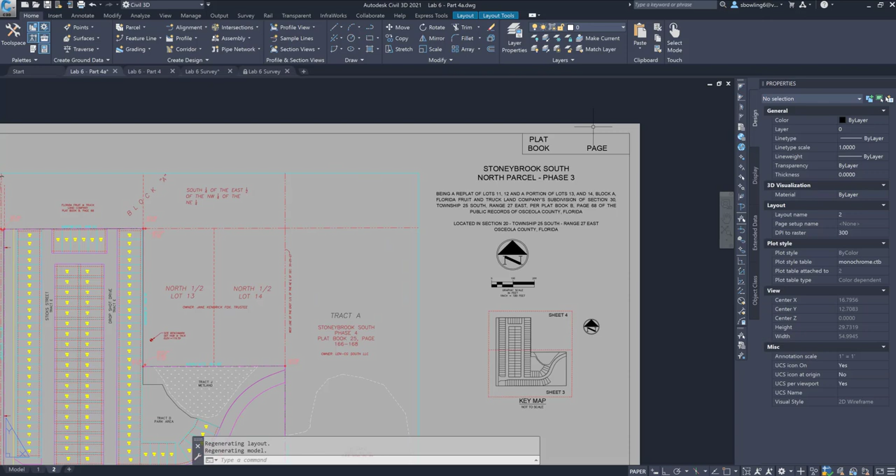All right, so I've added a little bit to the Plat. Like I said, I'm not going to show you everything. It's going to be your job to do the basic text. I'm just going to show you the information. So I went ahead and created the title, the Plat book and page number block over here. This is 5 inches this direction and 2 inches off of here.

I also copied the text here. Note the style that I used. I just found a nice style in the drawing that I already had. Just to let you know, the style is called scale bar. I'm not sure why, but I liked that style, so I went ahead and used it.

Okay, so I took the header, which shows up on all of the plats, each sheet, so you can see the Stoneybrook South, North Parcel Phase 3. It shows up on every single one of your sheets. So also what shows up on every single one of your sheets is your key map and your scale. Okay, so the scale is 50 scale when we go to sheets 2 and 3. All right, so that's what we're going to do today, is start looking at sheets 2 and 3.

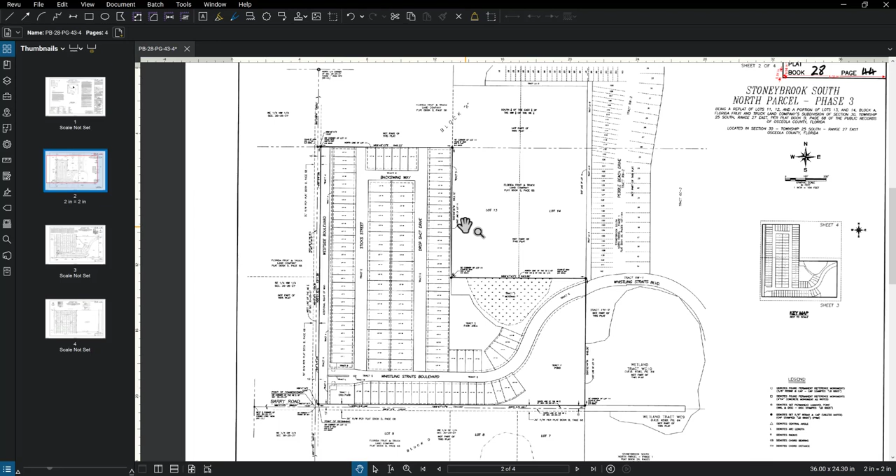I do want to show you that I started the first sheet also, but we'll talk about the notes in a later video. So go ahead and take a look at my sheet 1. What I did do is I did a screen clip and brought it in as an image. If you all don't know how to do that, how to XREF in an image, all I did is create a snippet of the Plat itself, and this is just an image.

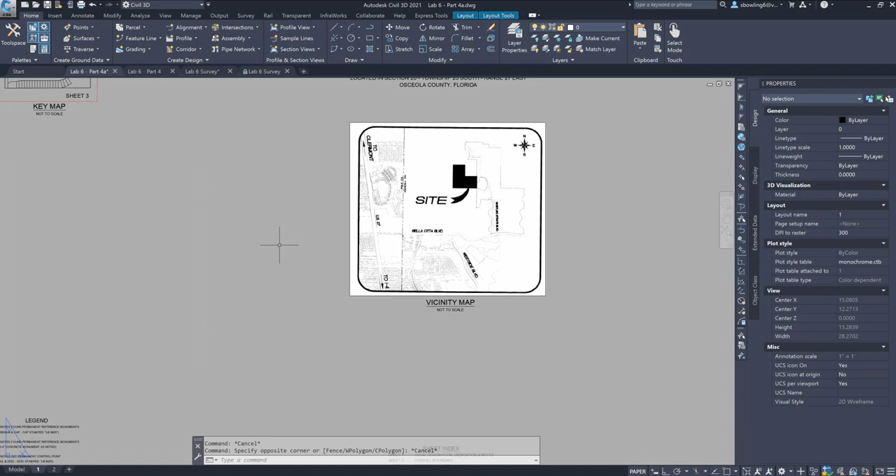If you look at the XREF, it's a raster image. So if you type in XREF, you can pull this down and you can pull in an image. All right, and that's all I did because I don't have the location map, so I didn't want to make my life any harder, so I did it simply here. Again, we'll talk about the legal description later. The legal description will go over here, and we'll talk about the dedication and notes in a later video.

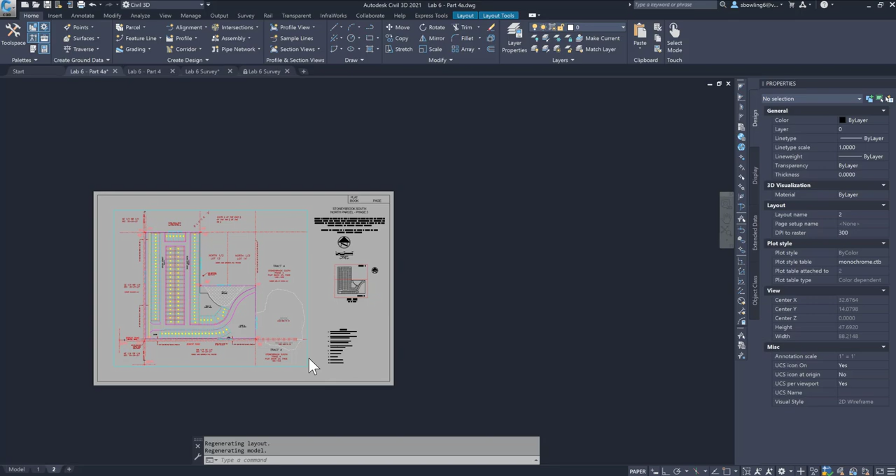Also, what I added in here, like I said, I haven't cleaned this up yet, but you all need to. Again, you all need to clean this up to make it look like the recorded plat. I did add the legend, and I started the legends on the first sheet. Now, moving on to the third sheet to get it started.

Again, I need to copy the key map, this piece of text, the Plat book. Ooh, I should have put sheet 1 of 4 on the first one and 2 of 4 on the second one, so I need to do that also. And I'll pull in the scale. All right, so let's go ahead and get started on that.

So what I'm going to do is, since I don't feel like copy and pasting, and I already know I'm going to use this information, I am going to pick sheet 2, right click, move or copy. When that pops up, you're going to create a copy and move to the end. And we're going to click on it, and we're going to right click and rename it to sheet 3. All right.

So the other thing that I'm going to do is I'm going to copy this piece of text. I always end up hitting circle, copy. I'm going to go ahead and put that. I'm going to change this height to 0.1. Actually, I'm going to go 0.15. Okay, and I am going to edit it, and this is going to be sheet 3 of 4. Not or, of 4.

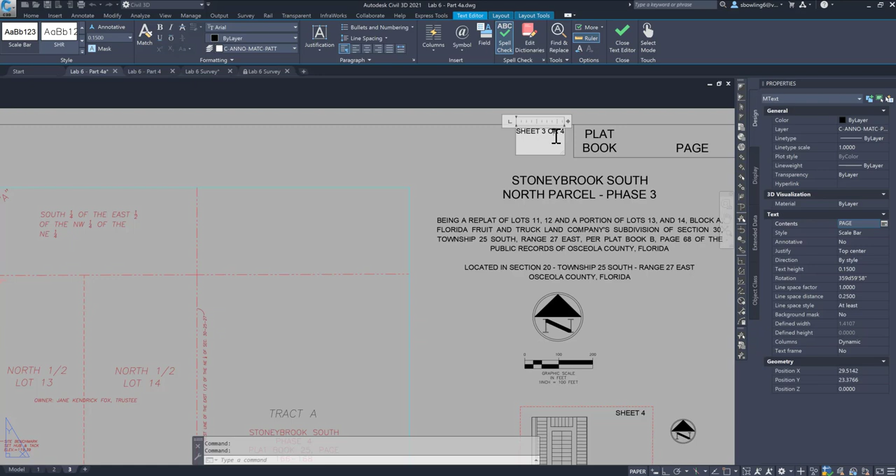All right. Now, the other thing is I'm going to click on this, my viewport, and I am going to change it to a different scale. So when I click on it, I have to unlock it and change it to a 50 scale. So 50 is not in there, so I'm going to click on custom. I'm going to add, and I'm going to say 1 equals 50. You can say 1 inch, you can do whatever you want. I'm just going to say 1 equals 50. 1 unit equals 50 units.

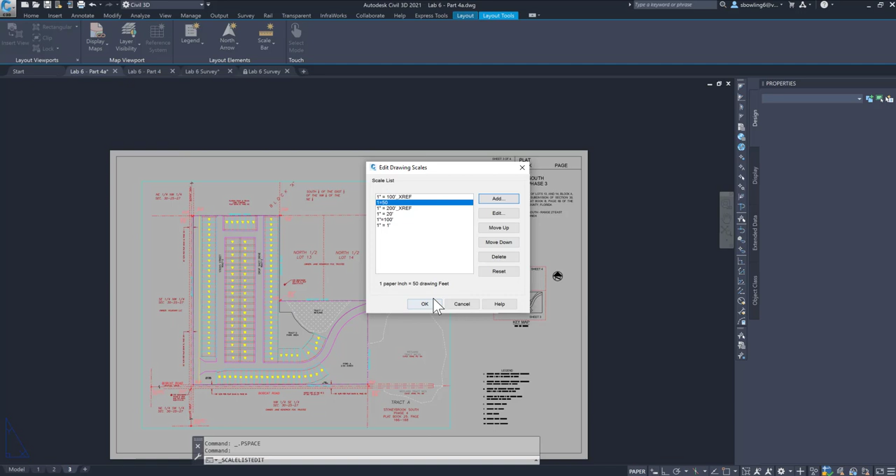All right. Okay. And I'm going to click on the viewport again, and I'm going to change it to 1 to 50. Double click inside and pan up. So I'm going to get this down to the bottom. Let me take a look at what it looked like. So I can see Berry Road all the way up to lot 12, and I can see everything over to the other side. So Berry Road, sorry, that says Bobcat.

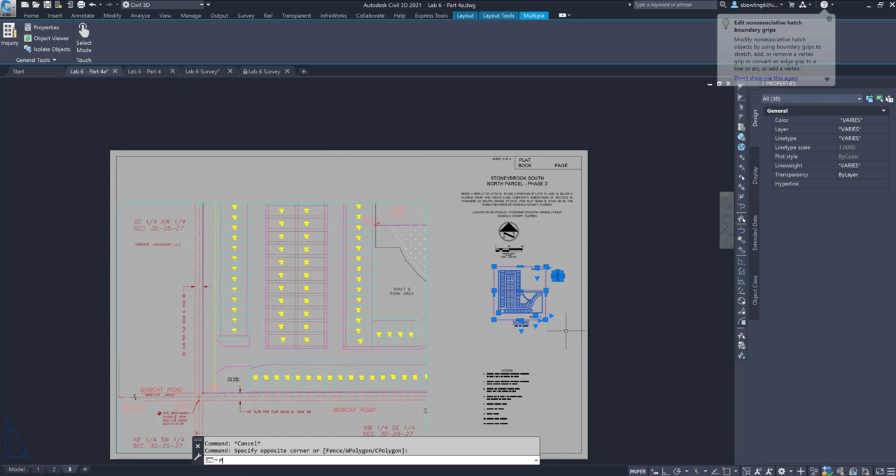So let me move this over. Let me go ahead and lock this since it's the scale that I want. So I'm going to move this over down here to this corner. And I've got to move this. I'm going to move this up here. I may end up having to scale that down. No, I shouldn't. It should be okay. And I'm going to move this up here. Now they could have left it over there.

And again, short-term memory. I can see 13, I can see 78 and 97. Now, 13, 78, 97, so I'm just going to pull this all the way over to this side. The other thing that I want you to be aware of is I need to take the word lot out there. Okay, lot should have not been in there.

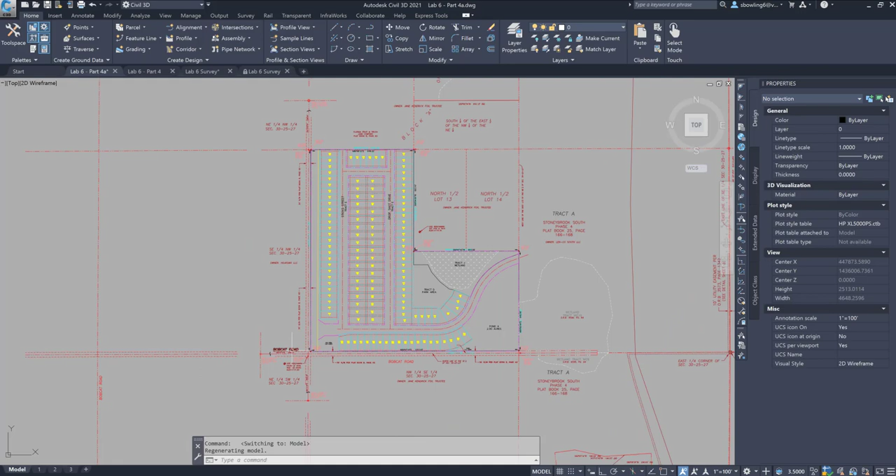So you know what you can do? I'm going to go back to the model space. Most of y'all have had to deal with Word, Microsoft Word and all that. I'm going to select similar. And I am going to type in find. When you type in find, it's like using find in any type of Word document. I want to find the word lot.

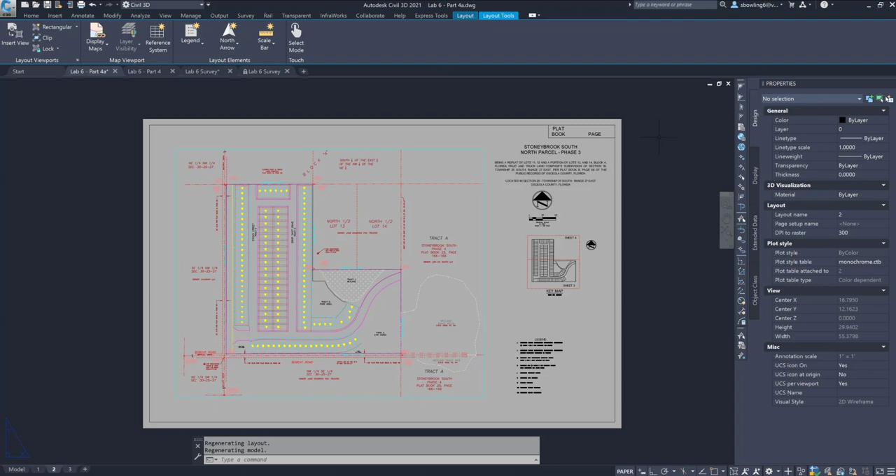Okay, so here's what you have to think of. Before I do that, I want to get rid of the word lot, but when I get rid of the word lot, it gets rid of the word lot in everything else. But because I have more words lot here, it'll be faster for me to get rid of the word lot here and then just retype it in each one of these. So that's what I'm going to do. Sometimes you have to think about the consequences. So I select them all.

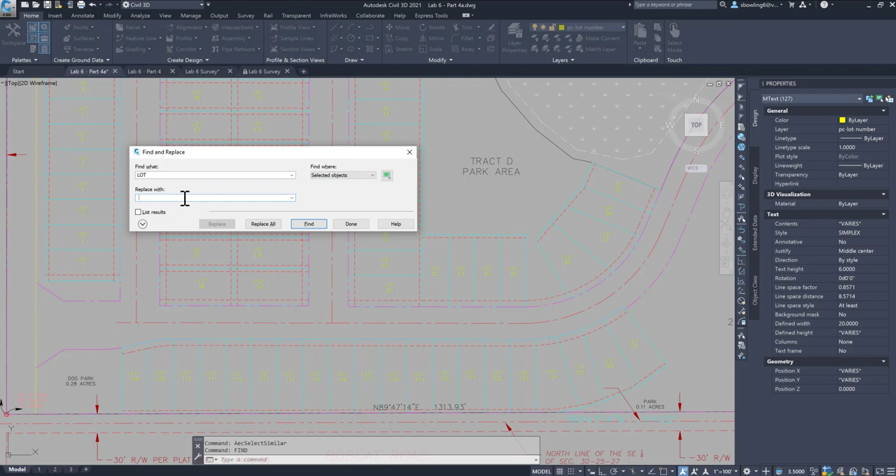I'm not sure where find is up here, but I know if I type in find, it pops up the find and replace. So I want to find the word lot and I want to replace it with nothing. I just hit the space bar once, okay? And I say replace all. And boom. Okay. And done. Now, it might be okay because I only highlighted. Yep, it worked. Because possibly I only highlighted the words in the model space. It also could be because it's not the word lots and it was just the word lot.

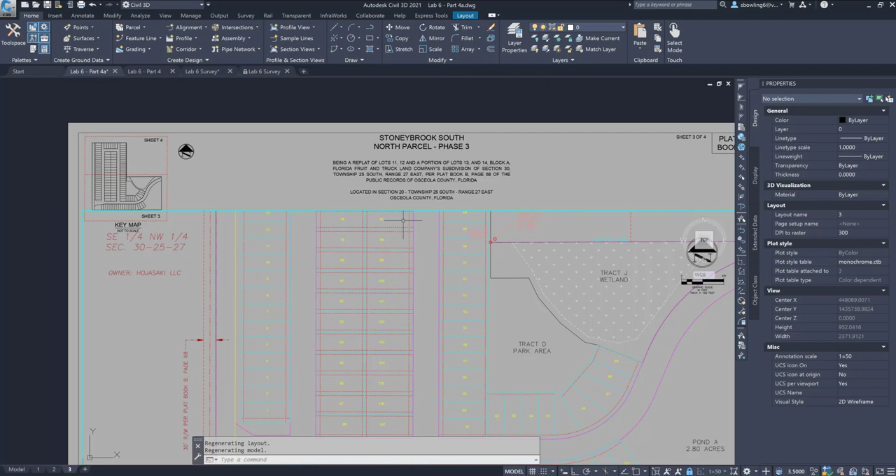So moving on, now I've got that all set up. Yay me. And I've got the first sheet looking like it should. So I can see this over here. And let me see. So I'm good. Now, the other thing that I want you to be aware of, I am going to squish that, is the match line. Okay, it goes through 49, 79, all that.

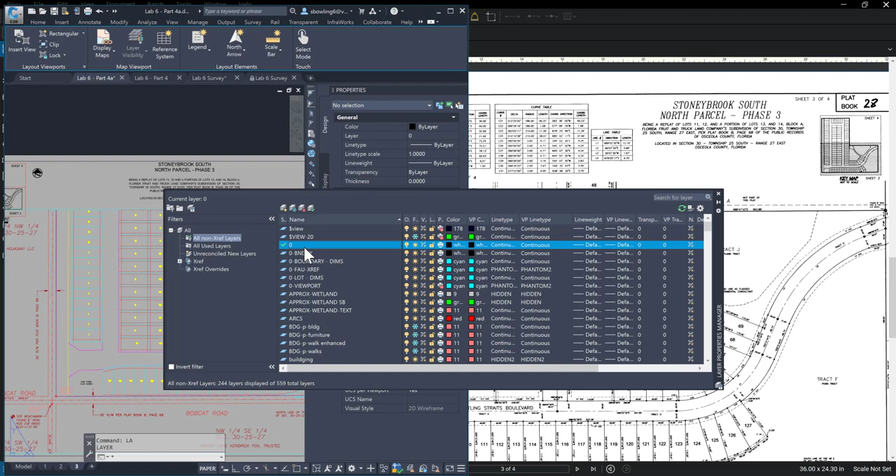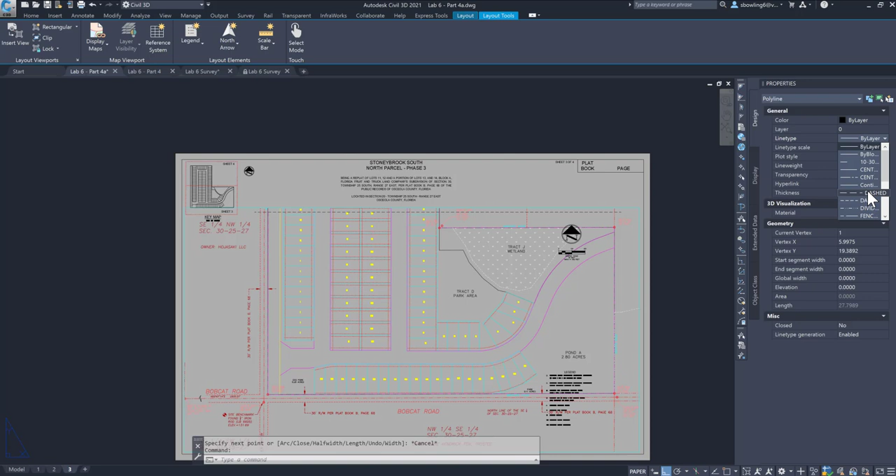And I'm going to draw a line through here. Make sure your ortho's on. You want it straight. You want it to have a hidden or a dashed view. Do dashed. Okay. Notice that the text is the found iron cap or iron rod and cap. I'm going to push this over to the side so I can look instead of flipping back and forth.

So this is twice that it's there. I don't need this one. So double click on the inside and I am going to get rid of this, delete, and I'm going to get rid of this, delete, and I'm going to move that over there. Now, text height, that's a bit big. So I'm going to change that. Let me see, the style is simplex here. I'm going to change that style to simplex. I like things to be the same also.

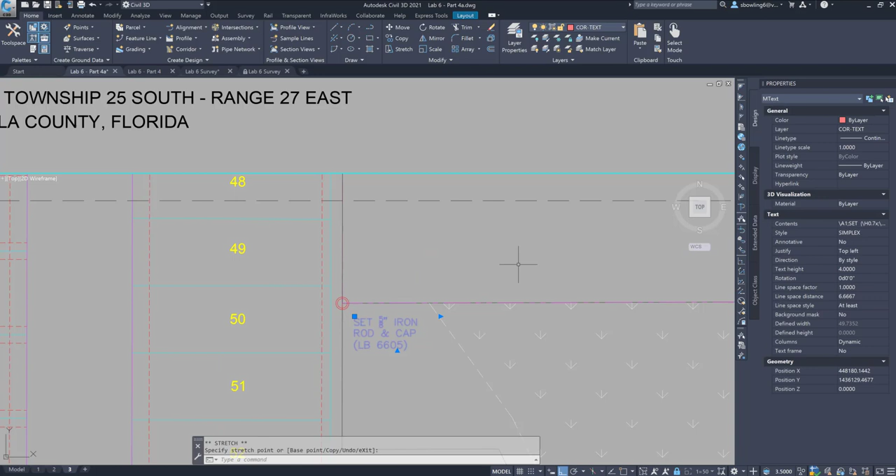And I am going to change that to, since this is 50 scale, so 50 times 0.08, not 8, should be 4. So that should be a 4 in height. Okay. All right. And we'll move this down to here. So that looks good. All right.

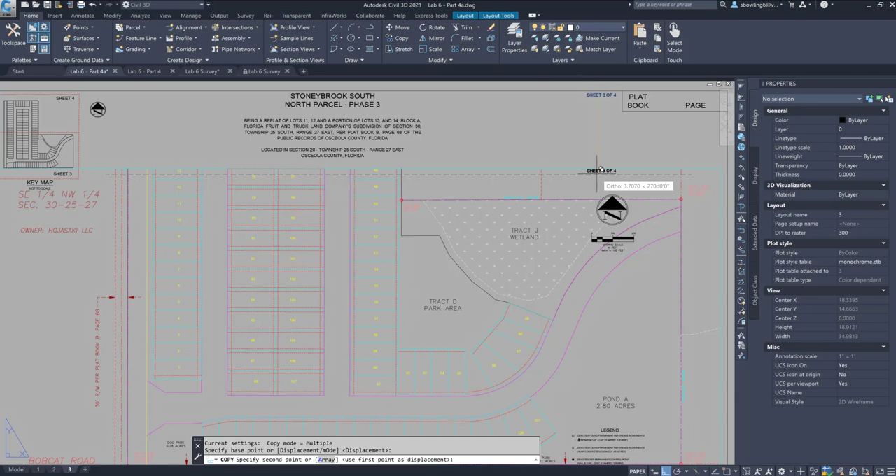Now what we'll do is I'll take a piece of text. I'll just grab this one. Copy that. Note the height. Ugh, I hate my keyboard is so slow when I go to hit copy. All right, so I'm going to call that a match line. Notice the height, 0.15. And you may have to make that bigger.

Match line A-A, I believe is what they called it. Just match line A, and it's 2 words here. I've seen it as 1 word, just FYI. Match line A.

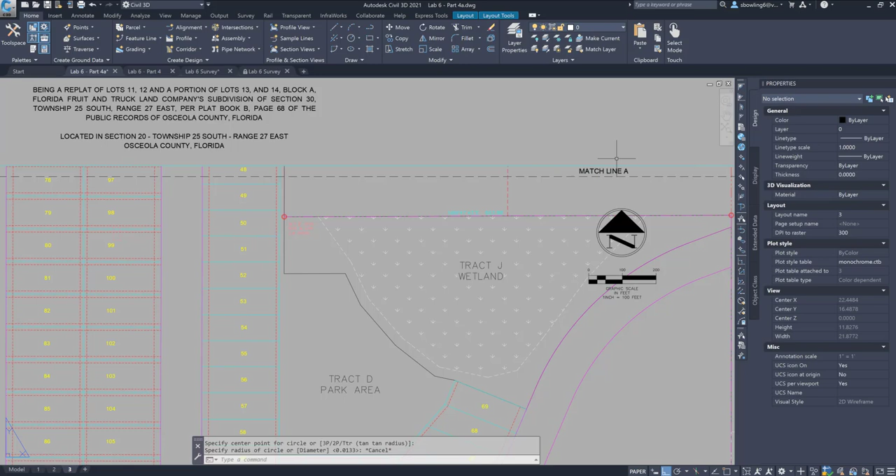They also denote, copy on—I'm just going to have to use the button up here. I hate that, but I do. Also up here, they denote 'not part of this plat.' And the reason is they don't want anybody thinking the offsite is part of the plat.

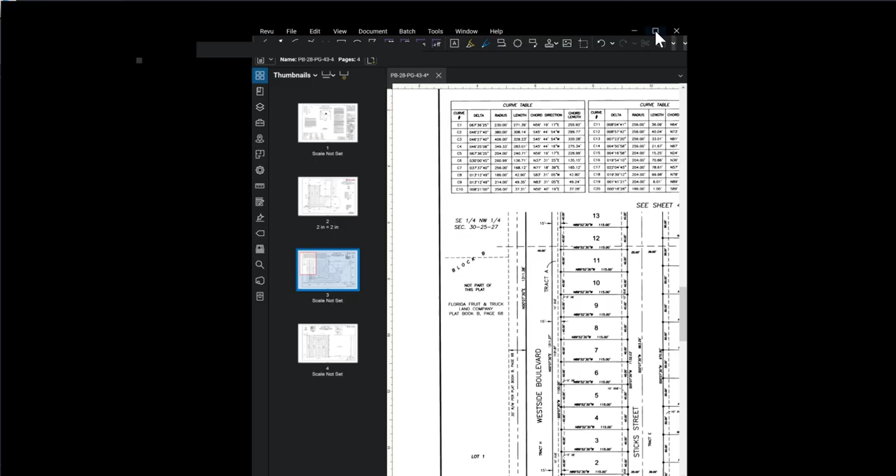Okay, also note that we have additional information, so 'not part of this plat.' It's also down here, or should be. I don't see it, but it should be.

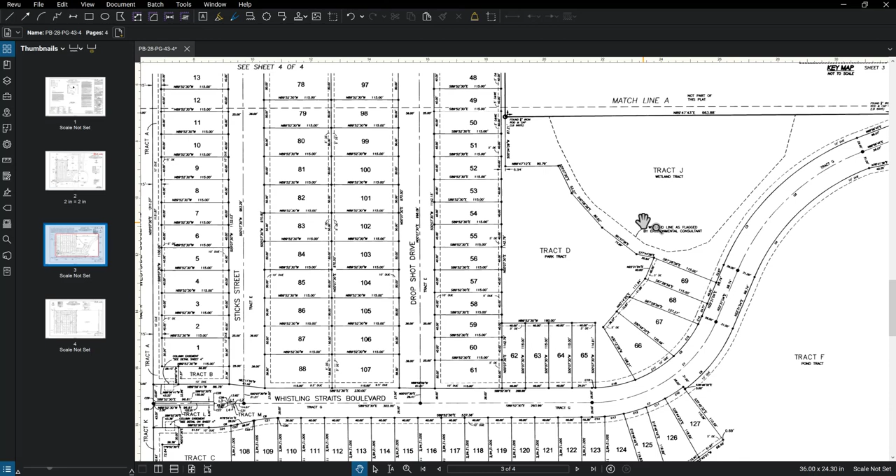Also, it has wetland line as flagged by environmental consultant, because usually they put those underneath easements. So be aware of that. I'm going to move this over to the side. A lot of this is going to be text cleanup for you all.

Looks good so far. Now, what they don't have on in each one of these is this line here. Let me look at the front one. Yeah, so I should have—let's go back. I should have recognized this, but I didn't.

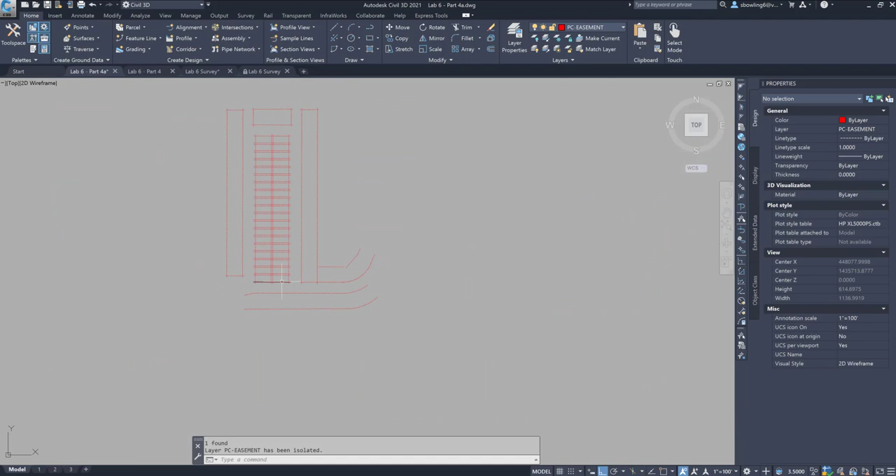Let's isolate these. Lay ISO. I should have gotten rid of these lines here. Because, and the reason is, lay uniso, is because the note covers that easement on the sides, so they're not showing it. Engineer plans usually show it, while the plat does not, because a note can take care of it.

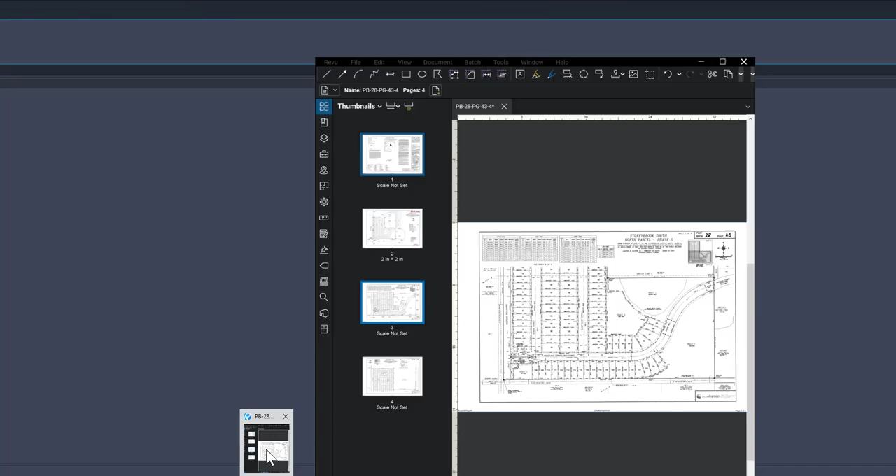Okay, now notice on this one, I have to turn the center line on again. All right, so you can see that the center line's on here. I also have to have the street names on here. So you're going to have to do a lot of layer management to be able to turn something off in one view and turn it on in another view. Just be aware of that.

All right, also should have had a continuation off here. Offset. Let's make this layer current, and double click and go into paper—I just clicked on paper to get into model to switch it and make that current. I'm going to offset 10 feet and make it through the layer, and current, and type in 10 because I need—

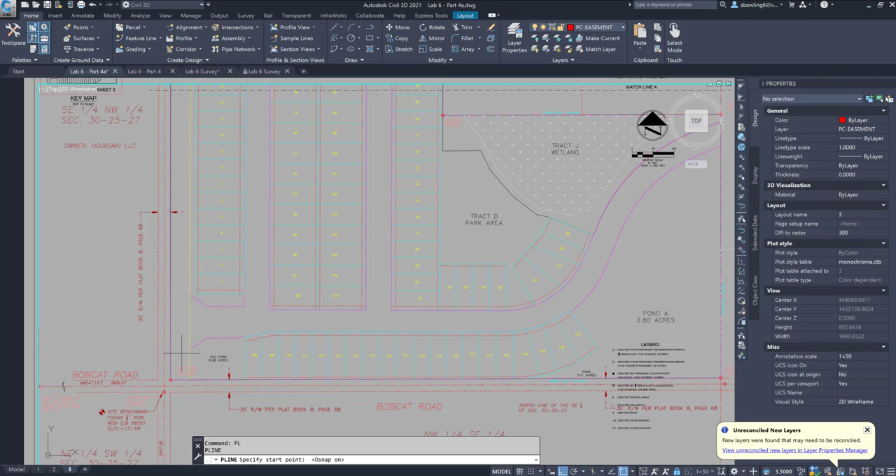Oh man, I don't want to break that either. So I'm going to trace over the top of it. And the reason I don't want to break that is because I want to be able to label the entire thing. Okay, so I'm tracing over the top of it. And now I can offset 10 feet, and then I'm going to delete the line over the top of it.

Same thing here. You can see that on this side is a 10, 10. Over here, I can see that I've got the 10, but there's also a tract B kind of broken down on this end. This one is—oops, this one's straight. So we need to straighten that out. See how that line is straight?

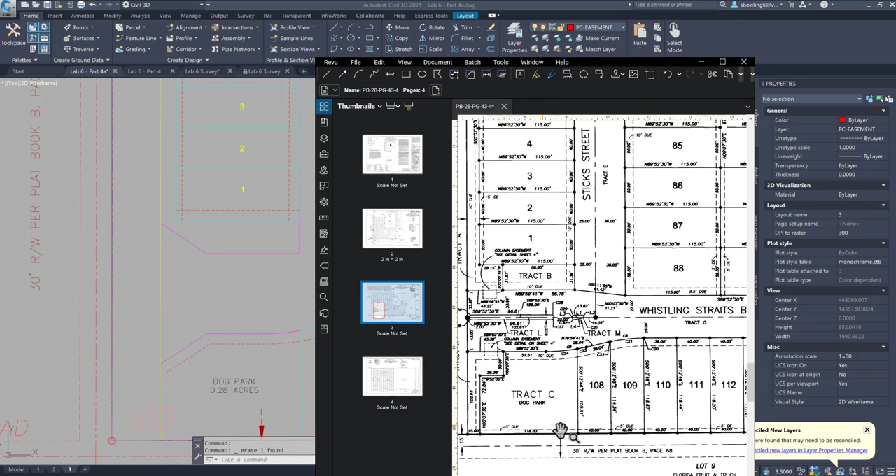So what I'm going to do is highlight that, hover over it, and just remove vertex. I'm going to pick this one, highlight that one, remove vertex, and then I'm going to extend—EX for extend—and extend those two out.

Do the same thing. Remove vertex, and then I'm going to EX extend that out. Let's take a look.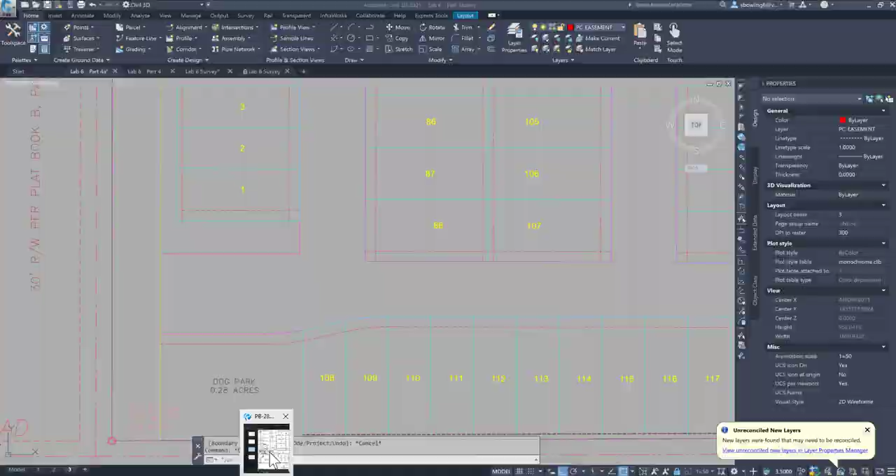All right, so this one needs to go away. I'm going to squish that so I can look at two things at once. All right, this one needs to go away. That's fine. Notice how this is trimmed at the end—it's filleted on this one down here. We'll do that. I'm going to delete that first.

Oops, and delete. So you can see, notice that one extends past—rhyme and reason, I don't know. Fillet radius 0. You can pick this one and that one, enter; that one and that one, enter; that one and that one. Should be good to go there.

Notice that's a total of 15, but that makes that a 10. So there's also a 10 here and a 10 here. So what we'll do is offset, enter—I'm going to offset that 10 here. Now I'm just going to draw a line, and go end point, and offset that 10 to the north.

Get rid of that and get rid of that, and trim. I'm going to trim out this middle piece. Don't need that. Oop. And fillet radius 0—that one.

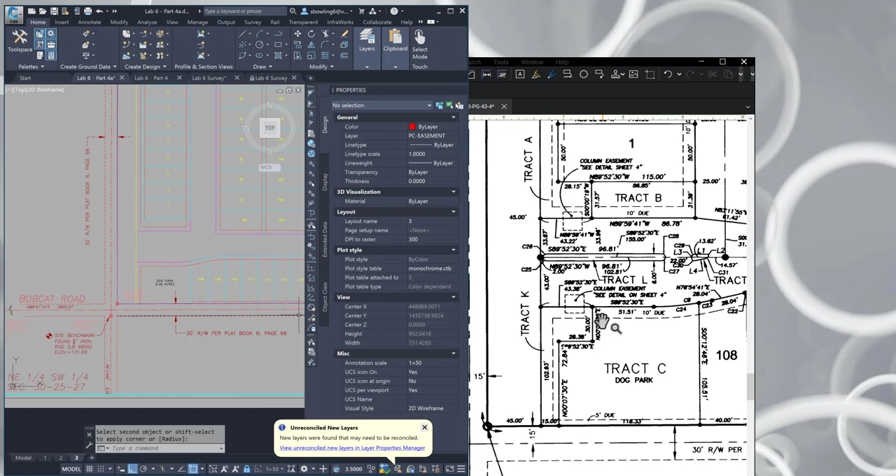We'll take a look at the column in a bit. All right, so let's talk about getting the spot grades, the labeling, these labels in, okay? So let me move this over and let me go ahead. So we have a label already created, right? So we have this label, but that label is going to be too big for this drawing.

So what I'm going to do is copy this because this is exactly what I want. To do that, click on - I'm sorry, that's just text. Grab the wrong one. I'm going to freeze that text, I think. Does everybody go off if I do that? Yeah, I don't want to do that. I am going to just delete that. As I go along, I'll delete pieces that I don't need. Okay, so this is the text that I want.

Delete that too - no, undo. I'm going to move this. I'm not sure what the arrow's for. Anyway, all right, so this is the text that I want.

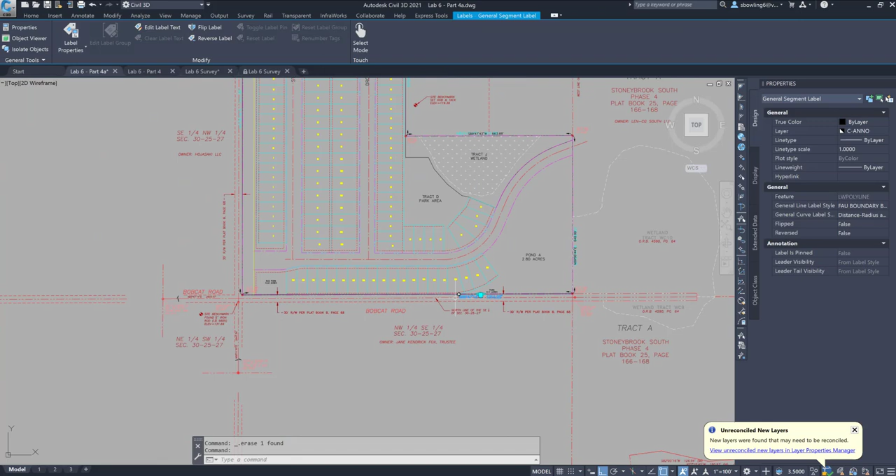Okay, I'm going to make a copy of that. And the way to make a copy of that is right-click - it's got to be highlighted. Right-click, edit label style, and then pull this down. I don't think I've created one already. No, so I'm going to pull this down and copy current selection.

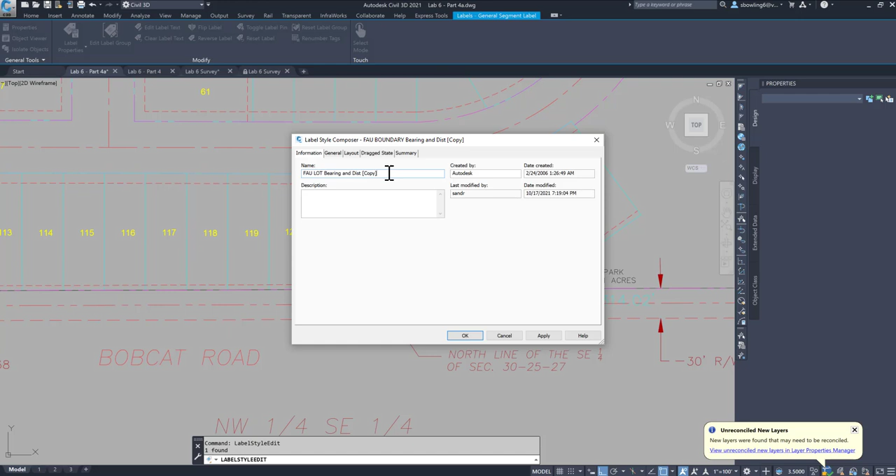I'm going to call it FAU lot bearing and distance. And then I'm going to get rid of that. Now at the layout, I need to change the height to 0.08, and when it's dragged, it needs to be 0.08 also.

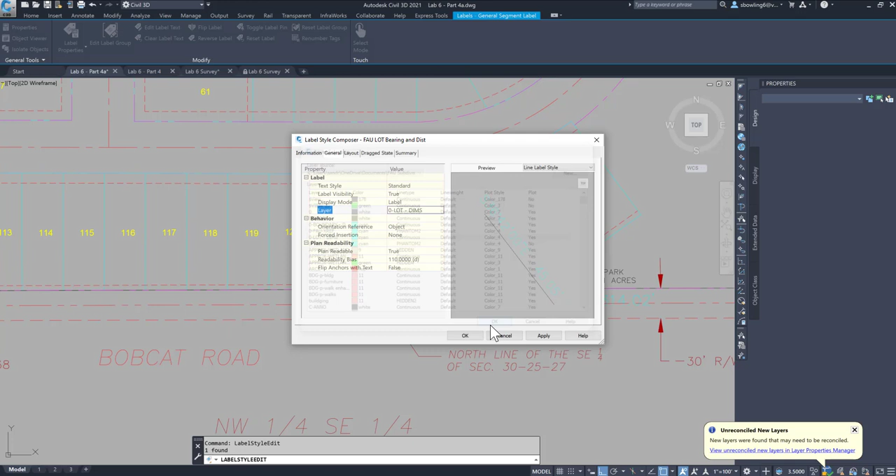Now, here's the other thing. It's on 0 boundary dimensions. We'll have to create a new layer for it, and we're going to call it 0 lot. We're going to put it to 0 lot dims. Okay, apply, and okay.

And I don't think I'd already created one, did I? No, all right - if I did, whoops. Okay, FAU lot bearing and distance, and okay. And the reason we put it like that is so we can turn the label off in one place and have it on in another.

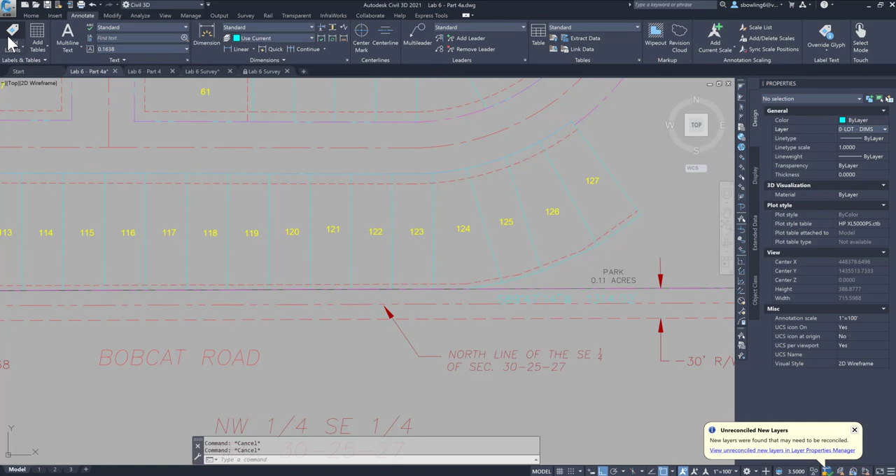I'm going to go ahead and put this on lot dims. So that's current. Now I'm going to come up here and go annotate, right? So I'm going to add a label, and that pops this up. When I add the label, I am going to add it to my line. Single, I'm going to change that to lot. I don't have any - I do have curves.

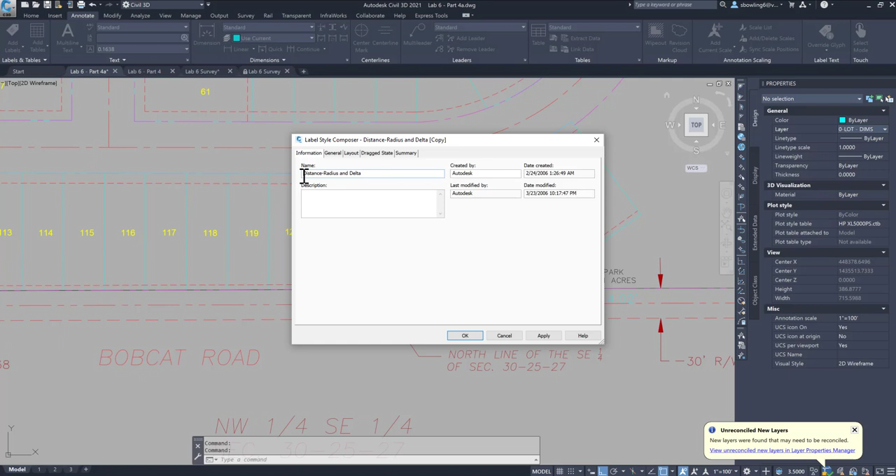Let's go ahead and make a copy, edit current selection, and create current copy. I'm going to call this FAU lot. All right, so again, underneath the general, let's put that on lot dims. On the layout, we'll have to look at each one of these, so we'll change that to 0.08. Change the delta, 0.08. The dragged state, 0.08.

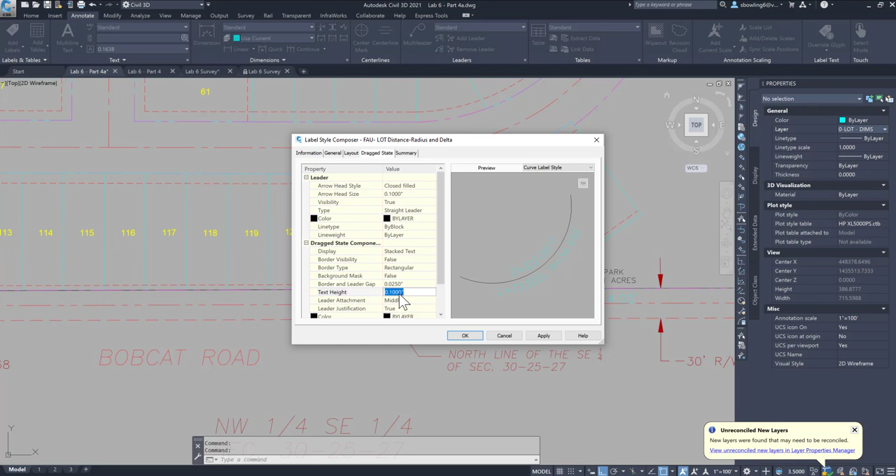Apply, and okay, and add. So we're going to start adding these. That one, ooh, okay. Now, and the reason - let's pause here for just a second. The reason it looks huge is because we have this scale here. If it was at 50 scale, it would look better, okay? So don't worry so much about that, because it's annotative, it'll look nice and neat.

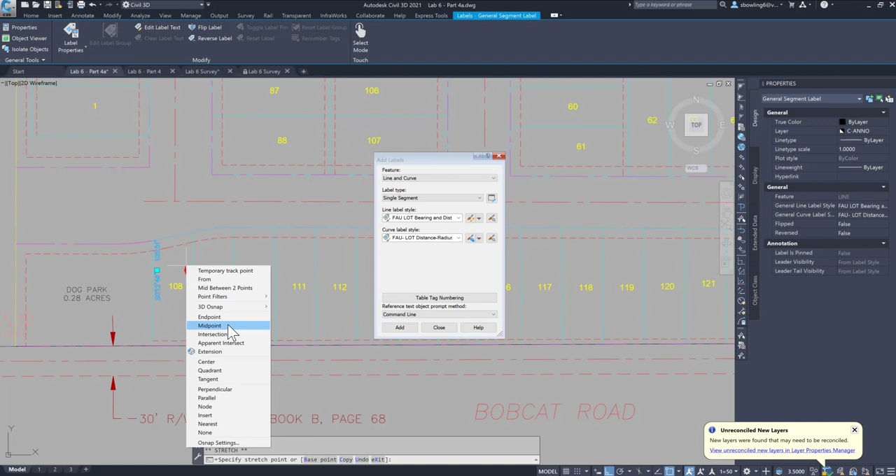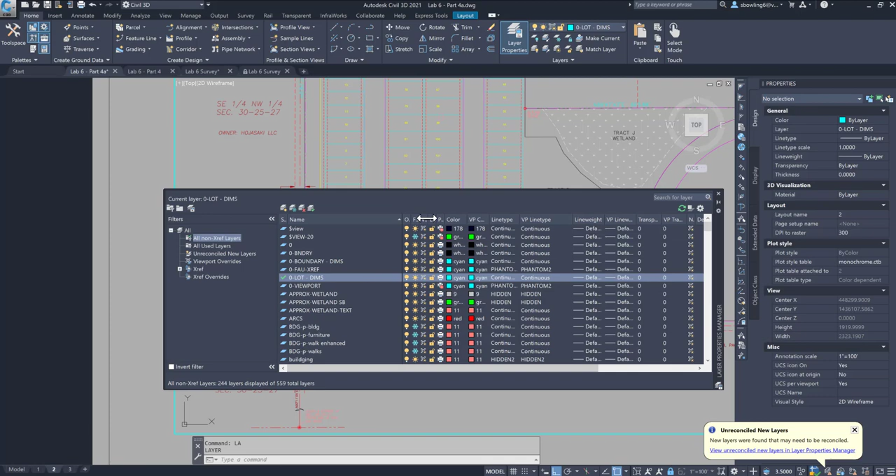And I'm going to put that to the midpoint. All right, so what I'm going to do is go to page 2 and then close it. In page 2, we don't want to see that. So I'm going to double click on the inside of it. I'm going to go home and I'm going to go LA, and I am going to, in the viewport, freeze off the lot dims.

Okay, so now I can't see them, but - where did my dim go? This one I can see. Oh, I must have - what did I must have done? Oh, I changed that one. That one should go back to - whoops, because I created it, I based it on that creation. So just make sure you're all good.

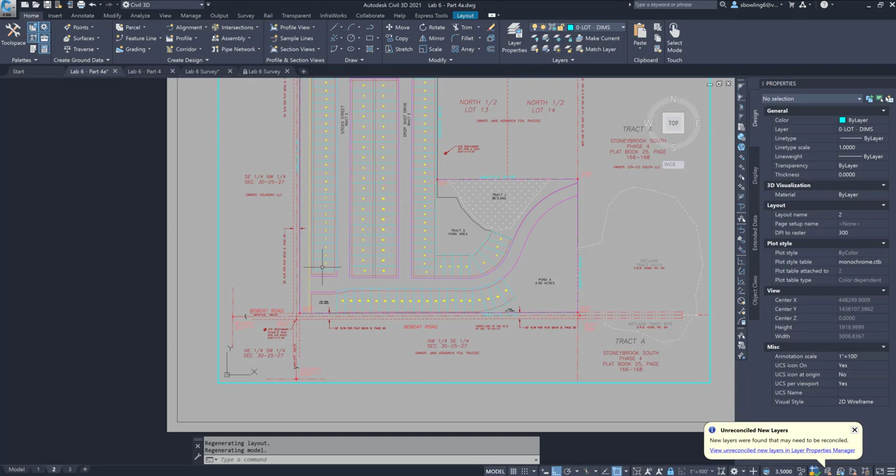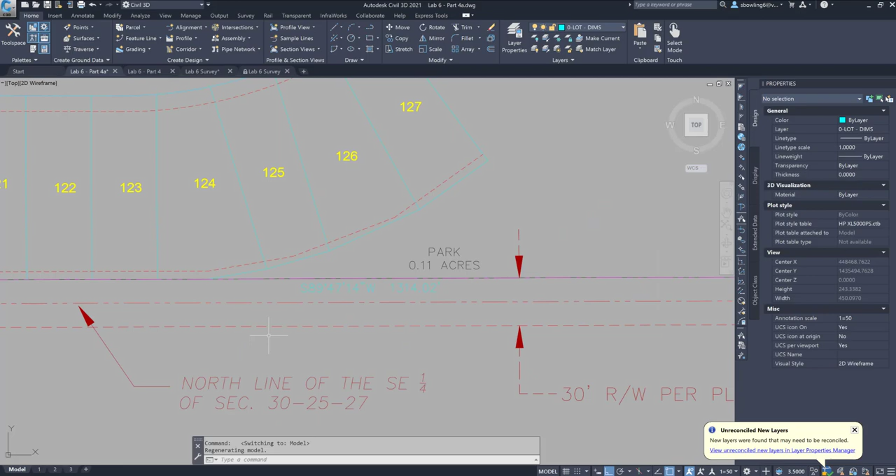And go back to 2. And there it is. Okay, but you don't see the lot dims, right? So I'm going to go to 3, and here I can see both. I'm okay with seeing both. All right, so you can do it through either model space or paper space - it's up to you. So now you're just going to start. Oh, I'm going to go back to model. Now, I would have liked to try to do the layers like that to isolate it and label it like that, like lay ISO, but I don't think that's going to work.

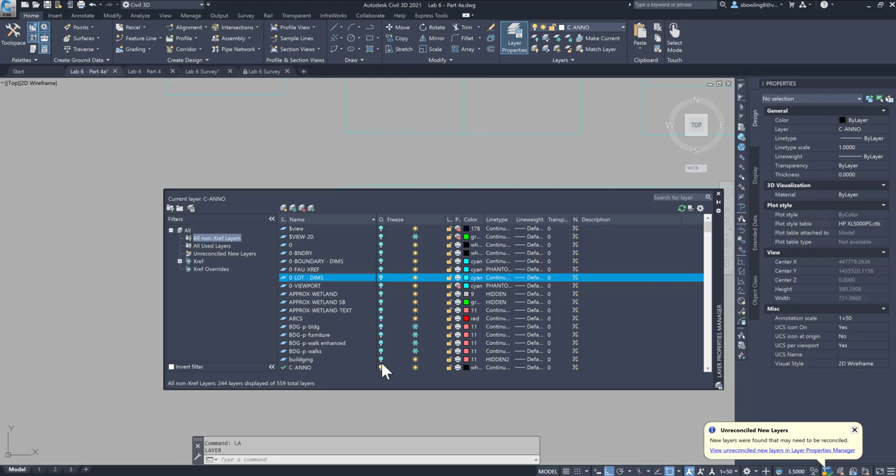See how it turns off the annotation layer. Now I've got my lot dims on. I see Anno, let me turn that back on.

Okay, so that did work. At least it works up front so I can tag them easier. Notice that it's C Anno - I bet you that went to the layer C Anno. It did, and it should have been - we can do this all at the end - that should have been lot dims. Okay, so let's go ahead and do it this way.

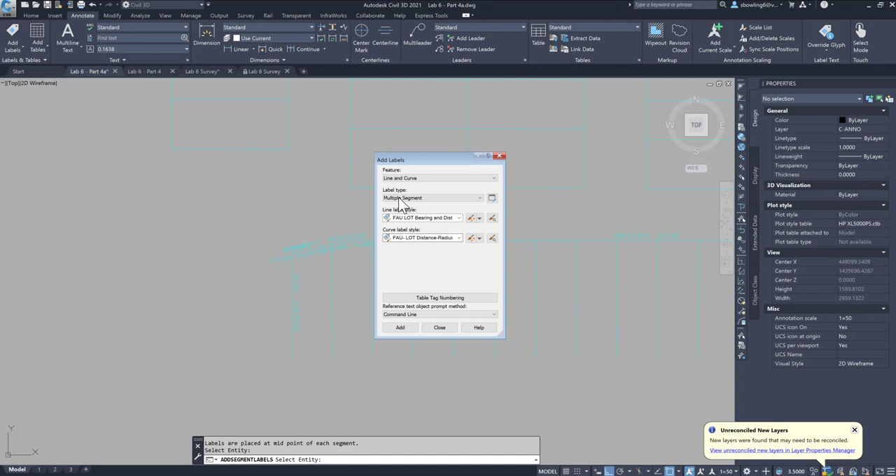I should be able to tag these fairly easy. Lines - now if I do multiple, and I use lot and bearing, and I use that - if this is one continuous line, it automatically generates all the information along that line. And I do need that information along that line, but I then also need it singly.

On this one, I don't think I can do a fence. F for fence, let's try that. Nope, it's going to make me click every single one of these.

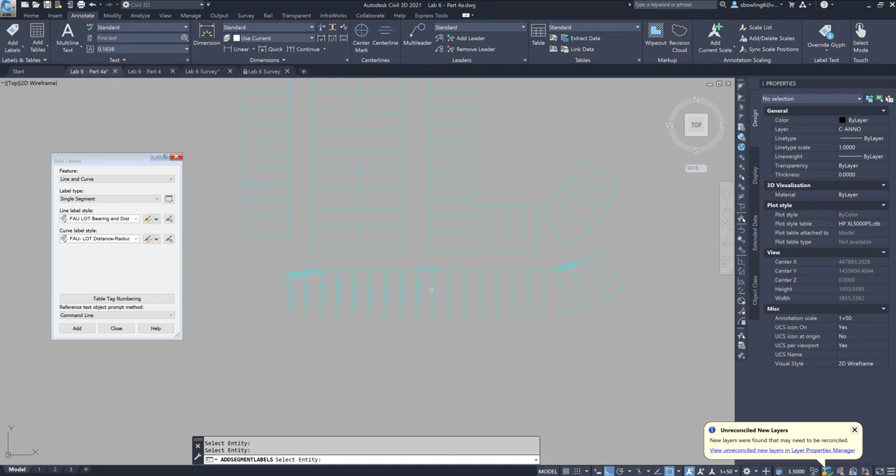Okay, while that's happening, I'm going to go ahead and pull this. Now here's the thing, there's two things going on. Let me pull these out of the way so you can see also. Let's talk about this.

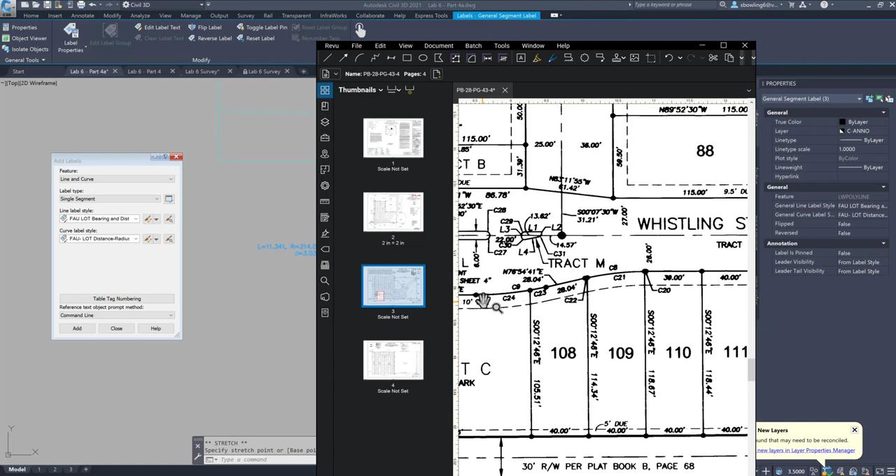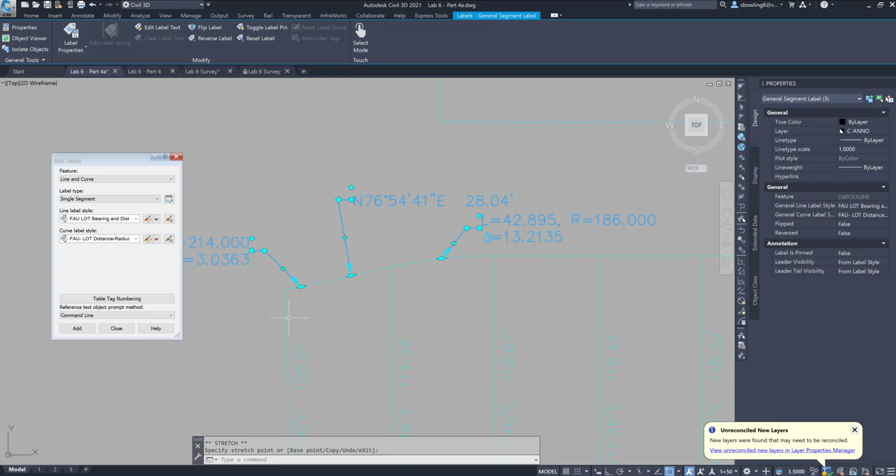Okay, notice that there is a C23, a distance, a straight line, a C22, a C8, and a C21. What it's doing is it's measuring the curve. C9 and C8 belong to the long curve that I just labeled - so this is C9 and C8, all right? The other labels, 23, 22, 21, are the curves that belong to the portion of the line that is within each of the lots.

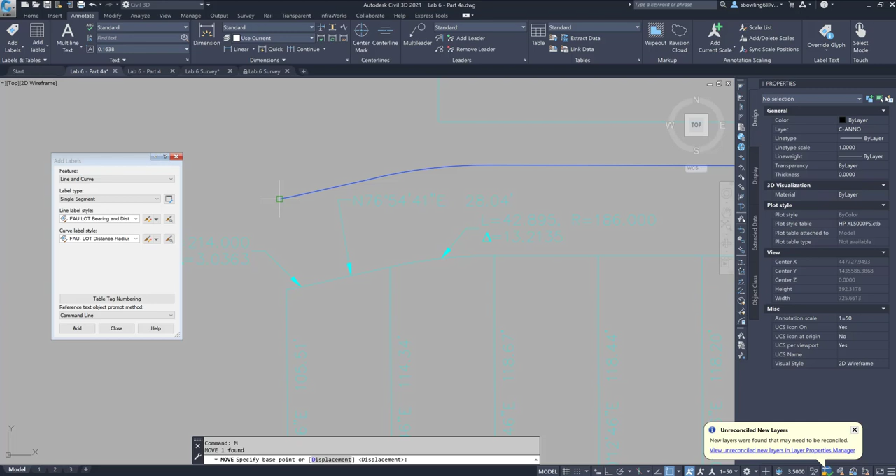So what you're going to have to do is, and this is, you'll end up copying. Copy - I'm going to put that here. I am going to change its color to yellow. Blue might be easier to see. And I'm just doing it so it's easy to see, and I'm going to pick that here.

Now you're going to use the break. When you use the break, the single one right here, break at a point, you want to make sure that both ends go back to that point. Hit enter.

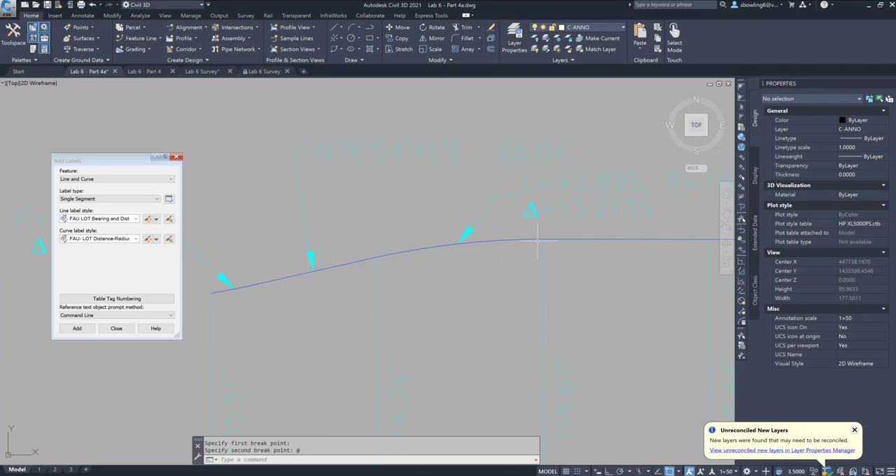Okay, notice that that one has a gap, so I need to bring that back to that point. Now if you don't, you've basically gotten the wrong information on your plat, so don't do that. So hit enter.

I always try to get close, and if it doesn't, then it's easy enough to grip, and sometimes it's almost easier to do it that way. Enter. And then you know that you're tying it back in.

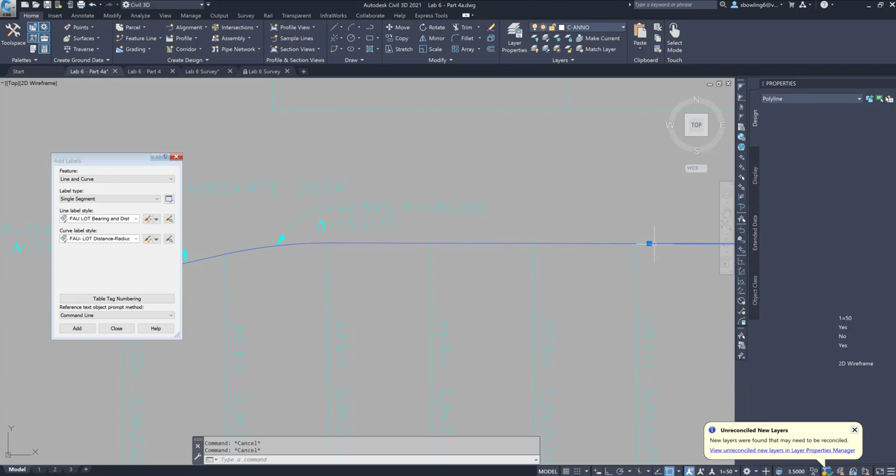Escape, enter. Enter just allows me - and the further, let's say I pick it over here - you can see it's easier for me to grip at that point in time. So maybe that's what I'll do. So enter.

And again, the reason I'm doing this is because I need each of these segments so I can actually label them for each of the lots. Okay, that is one option, to break it up and label each of the lines. Now you have to do that for when there's curves, because now if I do a single segment, I can now have a label here.

Wrong one, sorry. Okay, I touched the wrong curve. It's that one there.

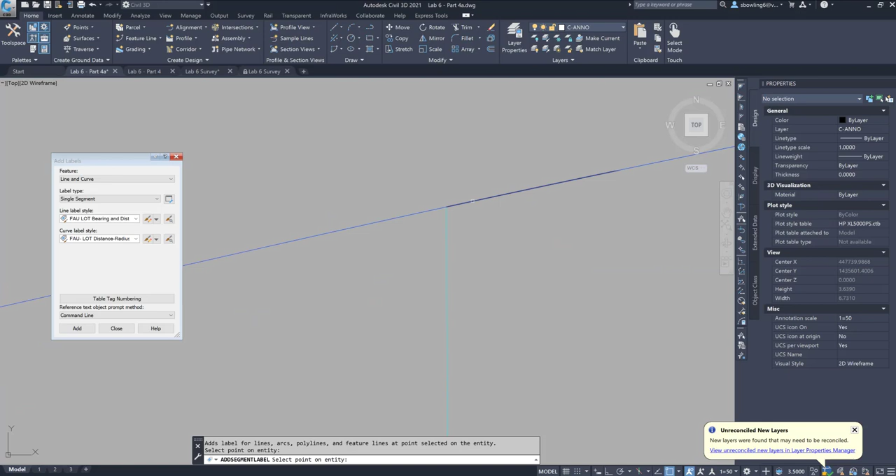Oh, it all is contained - there's not a little bit of a curve on the other side. Huh, hold on to that thought. Okay, so there's one here.

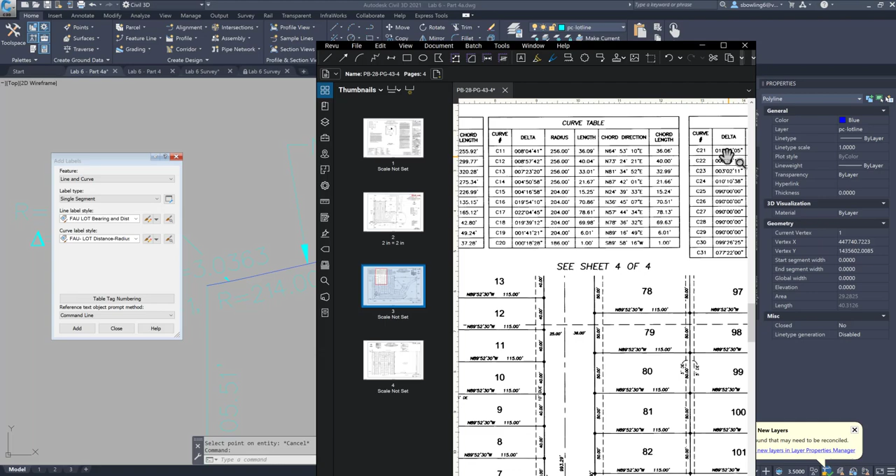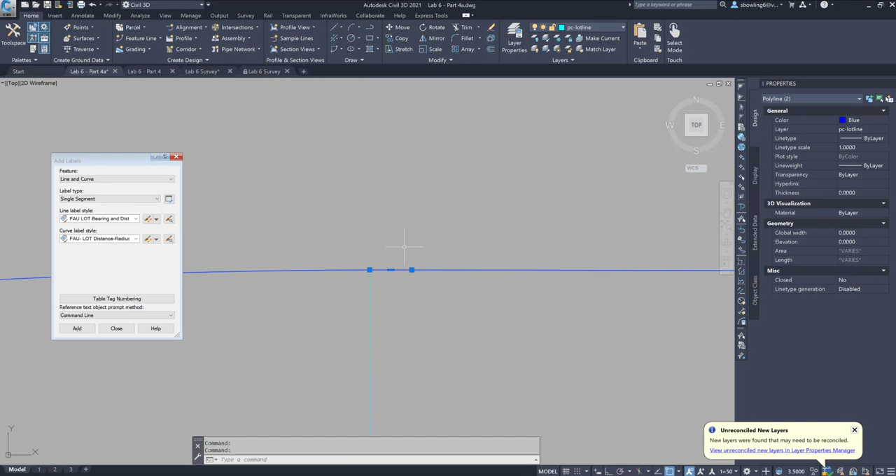These two, C8 and C20, one - C8, 13, 12, 49, and see how the delta is 12. So there actually is something that - yeah, see how that one, C20? So there is a bit of a curve that is on - well, there it is, there's that bit of a curve. I knew there was, so there's a little bitty bit of curve right here and a curve right here.

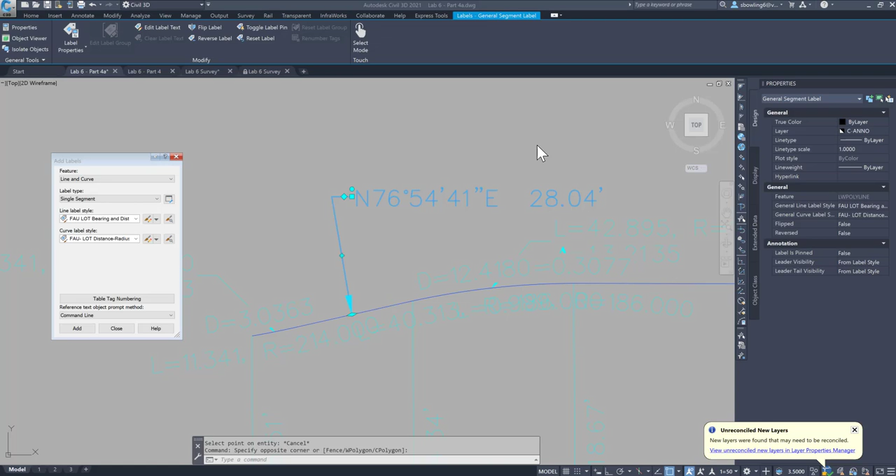So let me get this out of the way. This is - I should save before it crashes on me. Okay, just saved it. Now let me pull this up.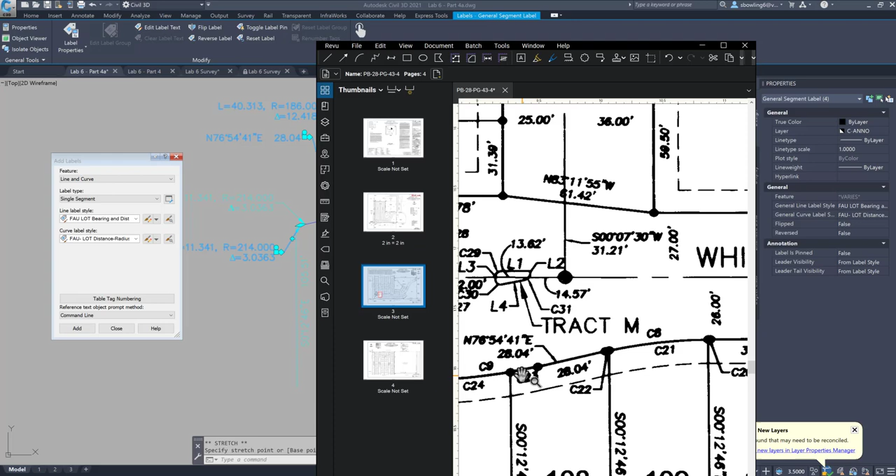Now this is why we use the C values, okay, because it would take too much space on our plat to deal with this much, okay? So let's take a look at the plat again. So over here, I only have a C23. The 9 continues on, so just FYI, I'm not going to worry about this right now.

Now, instead of breaking all these up, there's a nice feature that is a line between 2 points, and we will use the lot and bearing. I'm sorry, I will do a distance only. So I go add. Now, depending on which direction you pick, tells you where you're labeling it. On this, I don't like that style, so I have to edit it. I don't remember what we called the other one, so I need to look that up first.

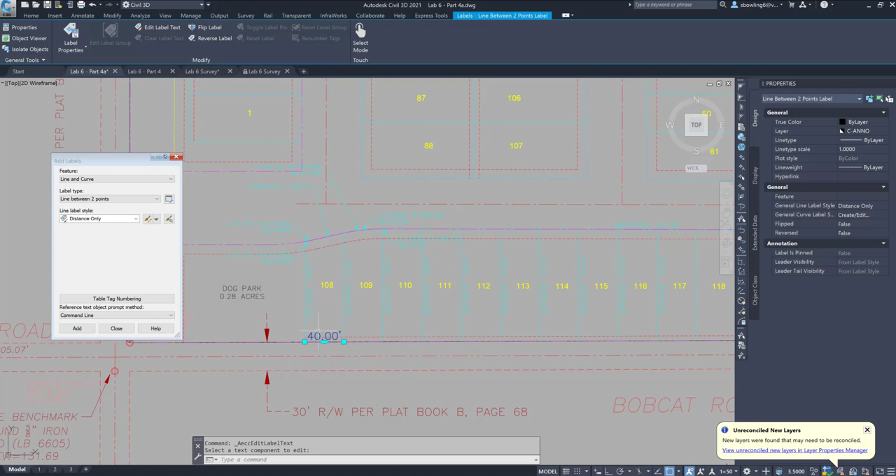So I'm going to create edit, make sure that it says edit current selection. Take a look, it is 0.08 and it's standard. So it's 0.08 and standard. You can edit label text this way and pick it, and that's not what I wanted, sorry. Right click, edit label style, pull this down, edit current selection. Make sure that it goes onto the layer 0 lot dims. You may have to do a lot of moving stuff because CAD is not as friendly as I'd like it to be. 0.08 in height.

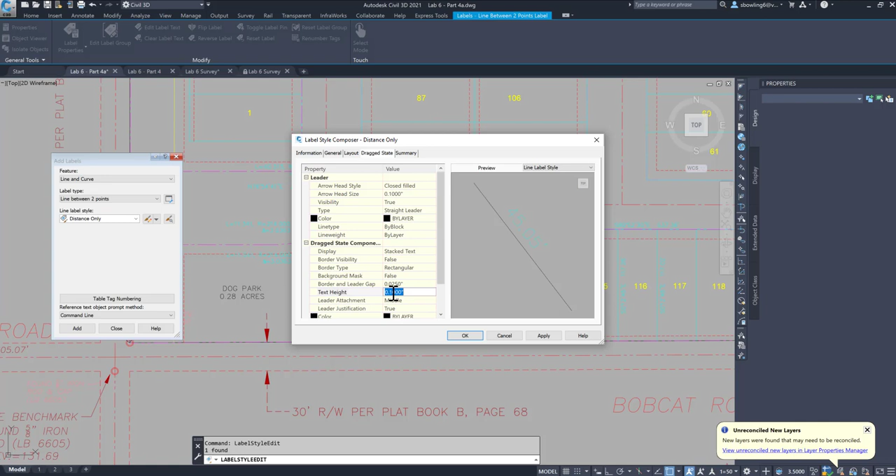There is really no drag state. It says bearing, but that's not true. This is a distance. Okay. Go back to general. Text style that, height that. I always go ahead and change it even though I know in my mind it doesn't do anything. Apply and okay and okay. All right. So you're good there.

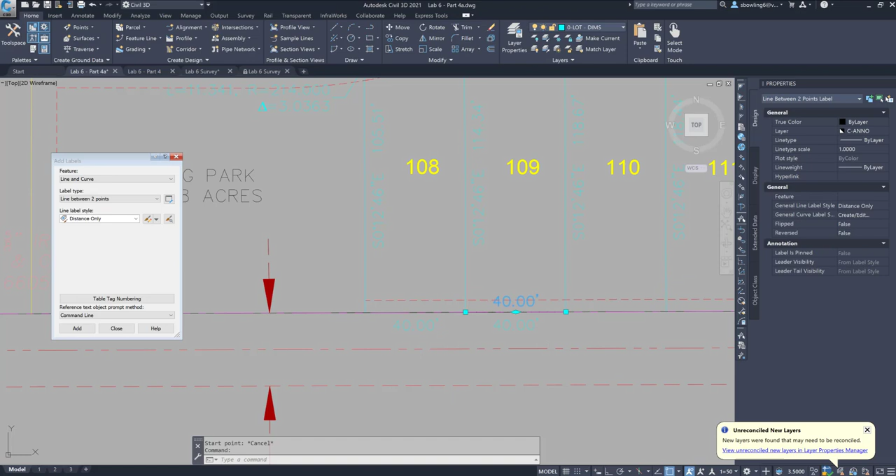The other nice thing is, when you click on that, since it's in the middle of that text, I can flip the label. So I can just keep adding endpoint to endpoint. If I bring it this way, it automatically puts it on there, so I don't have to go back and do all the work of flipping the label. Add this direction to this direction, this to this, this to that, that to that. It only works really well for straight lines. This to this, on the bottom.

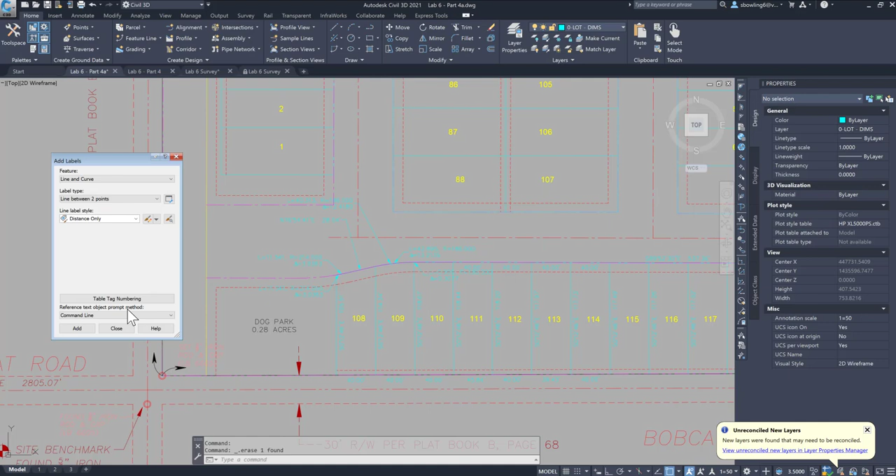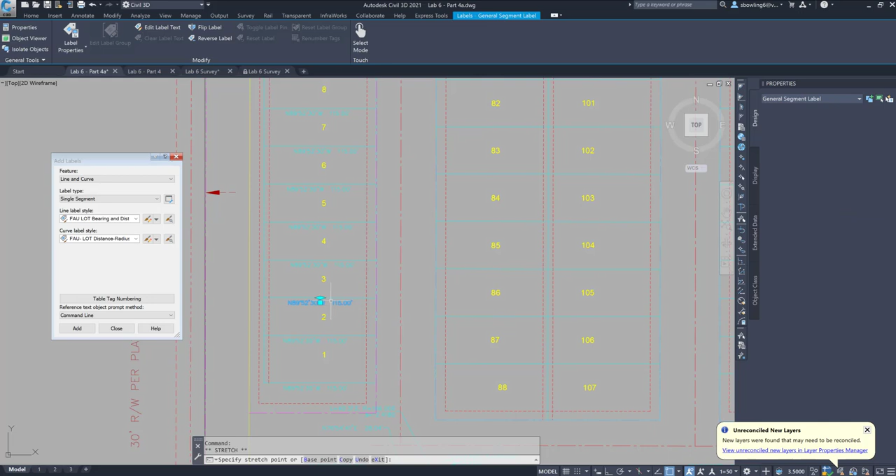Okay. So your job now, I'm not going to do all these and have you watch me, is you're going to go single segment, and you're going to add these to every single one. Try to pick in the middle, save yourself some headache, because if not, you're going to have to go back to each one of these and make sure your snap is on and it's at the midpoint. All right. I'm going to stop here and take a look at our plat. So far, so good. Our viewport is locked and ready.

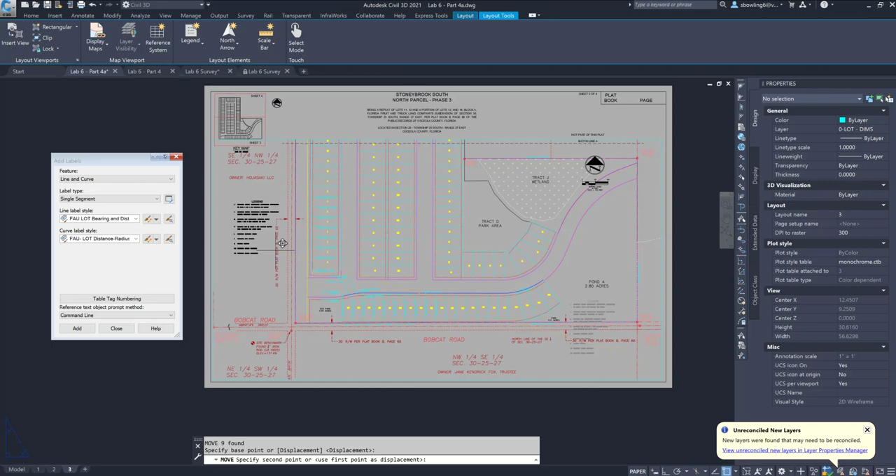So that's locked. And I'm going to move my legend over to here. Oops, that's taken too much. Move that to over here. Now the other thing I have to do is double click on the inside here and type in *CL, because the center line needs to be unfrozen in this viewport because we need to label it. And I'm going to use the lot label. Let's take a look first to see if the text is the same height. The center line label, yep, it's the same height. So I can use the lot label that I've already created.

And I am going to label the center lines. I'm going to extend out that center line to that point right there. So I am going to go multi-segment and lot, add to this one, to this one, to this one. Now, here's the thing. I need to break this one here, and make sure it snaps back to there.

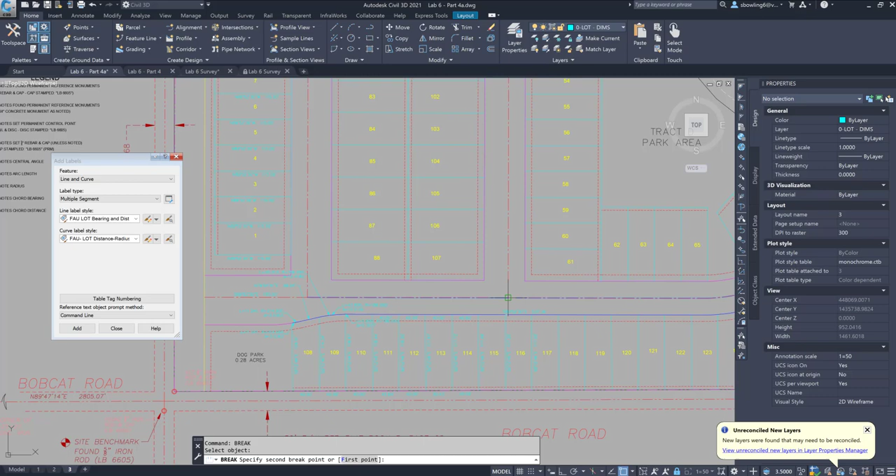Again, I'm comfortable with using the break command, but when you do it in your job, make sure that you're not screwing up the bearing and distance. Okay, so I'm going to do that add again on this line. You have to give the bearing and distance in between each of the intersecting center lines. Okay, so I'm going to copy. Double click out of here.

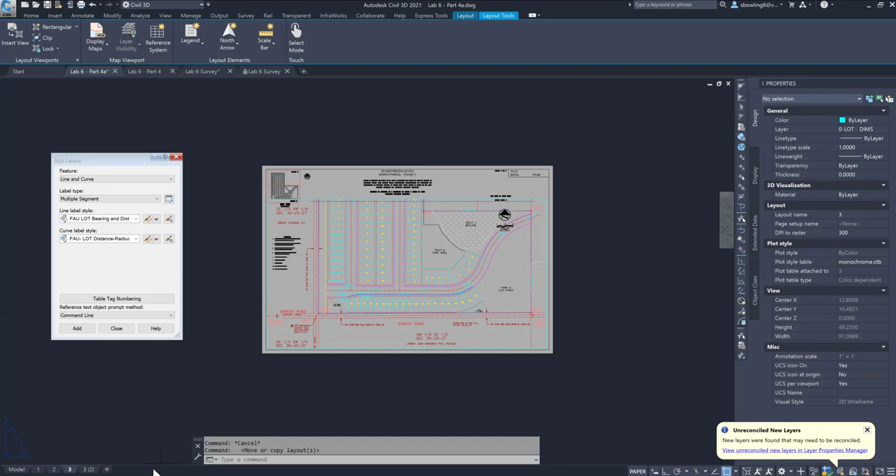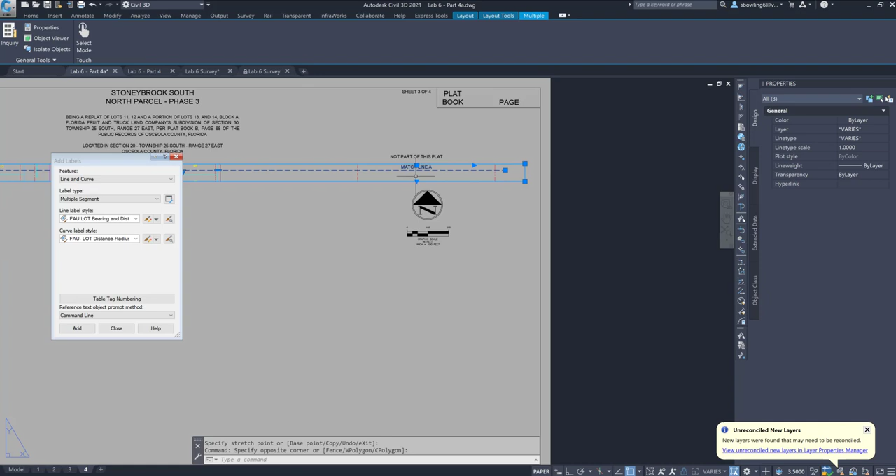I am going to copy this one into page 4. Move to the end, create a copy, okay. And rename 4. Now when I do that, all I'm going to do is take this up to about here. And then I'm going to move this all the way down and turn my F8 ortho on. I'm going to take my snaps off to here. And then I am going to drag this viewport back up.

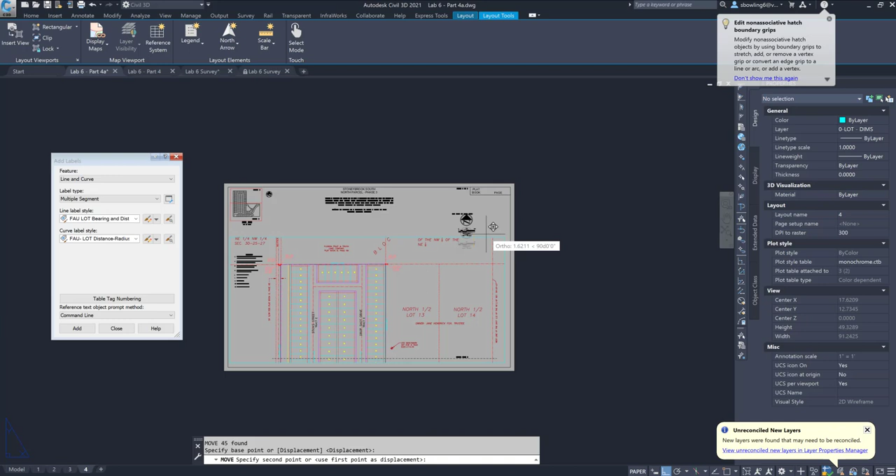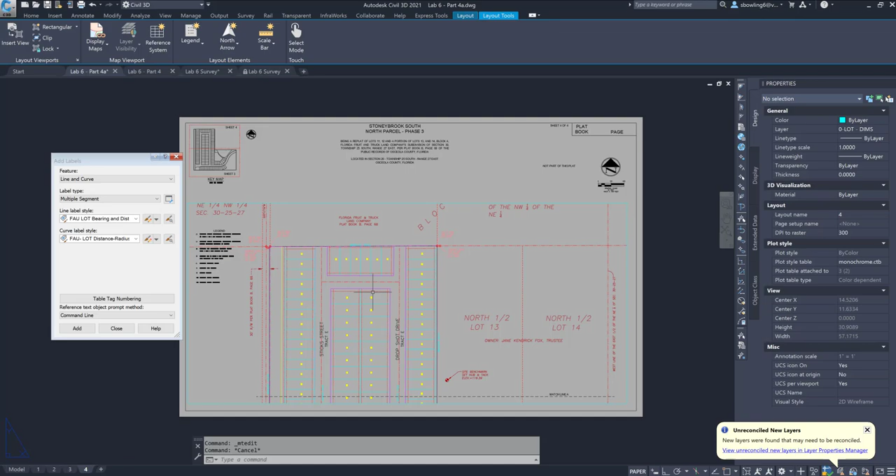And there we go. So technically I only need to see it to here. Then I'll get this and move this over, F8, here. Change this to 4. The other sheets need to be done too. But I'm going to stop here, and this will be our start. Finish up labeling all of the lots, label the center lines, and take a look at what else you can label. All right.

Next video, I'll show you how to do the curve tables.